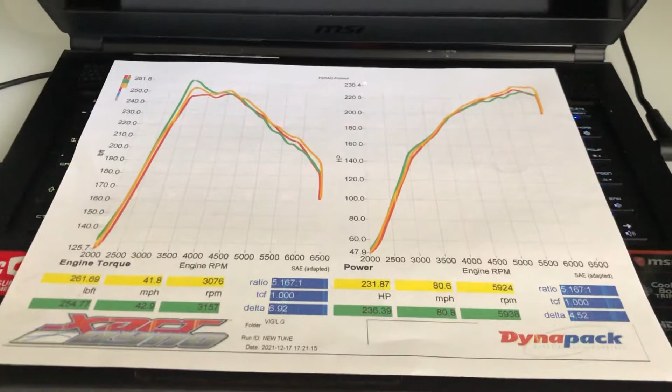I uploaded this, it's kind of a short video of the dyno that I had done yesterday, just for fun. But I wanted to make another video to go over in detail what the power bands look like, and also provide some context as to what is actually happening with this new AIRTEC Inlet. I know a picture means a thousand words, but I wanted to fill you in.

Prior to this, I had just installed the AIRTEC Inlet and didn't tune it. So I just bolted it on and ran it, and I think it ended up giving like 216 horsepower, something like that, and I can't remember the torque exactly. It's in the other videos, but it wasn't as much as it is now. I think I had gotten like 230 something torque or whatever.

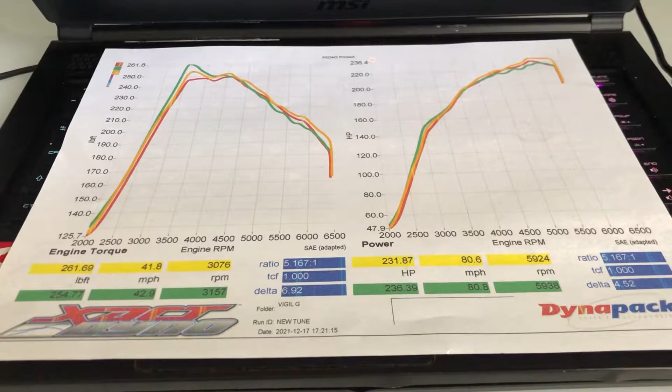So then Ron at WHOOSH had suggested that I get the tune revised through my tuner, Adam at Tune Plus. So I went ahead and got that going, and now I have it tuned, and we have some new numbers here and some new dynographs.

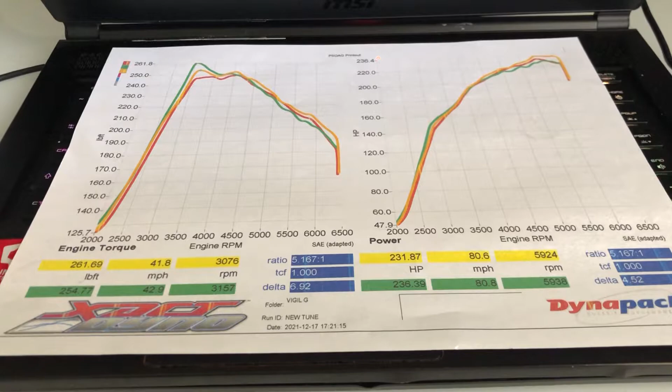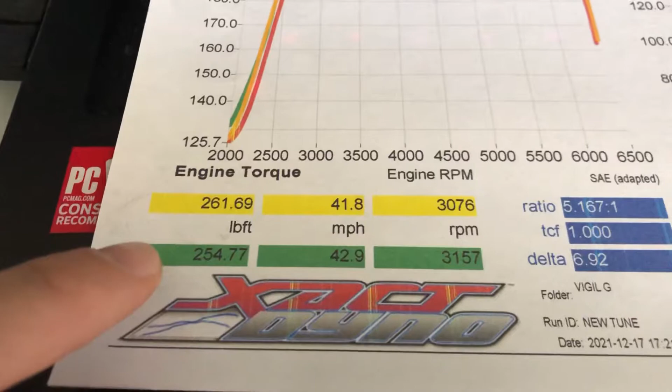For the torque, I think this is gonna have all the highest numbers. So prior to the tune, with the WHOOSH short ram intake, I was making about 250 something pound-feet of torque, and then once I added the AIRTEC Inlet, it actually had dropped. So I got the tune, and the last two stronger of the three passes gave us 261 pound-feet of torque on the third run, and 254 pound-feet of torque on the second run.

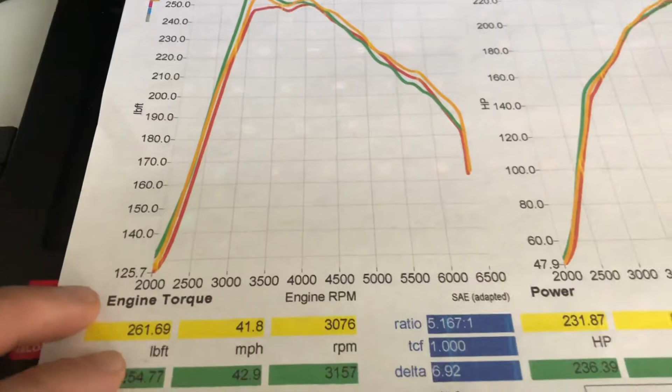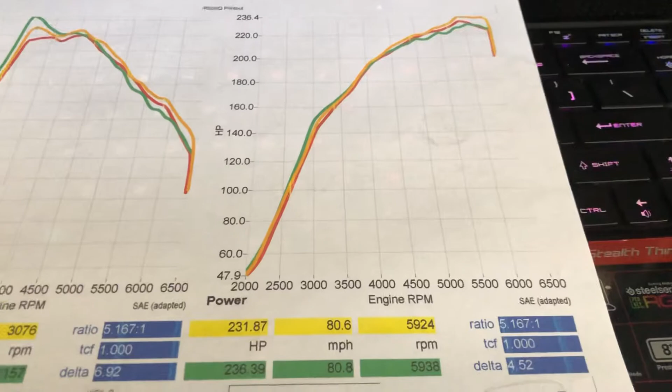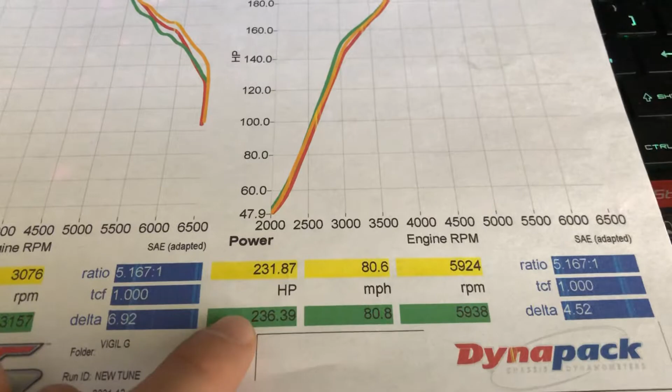And so there's the power band. I'm going to show you this other screen with more detail. Prior to this tune, we had like 215, 216 horsepower. But prior to that, when I originally just had the WHOOSH short ram intake, I was around 230 horsepower roughly. So with the tune, now with the AIRTEC Inlet, I did manage to get back the horsepower I think I had lost by adding the inlet without a tune. The third run was 231 horsepower, and the second run was 236. So we're basically right around or over the horsepower numbers we had prior to installing the AIRTEC Inlet.

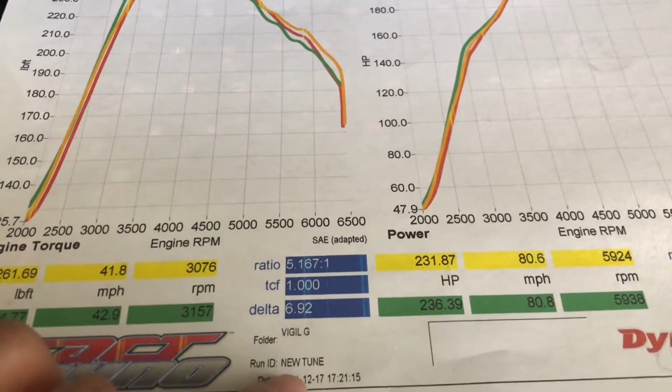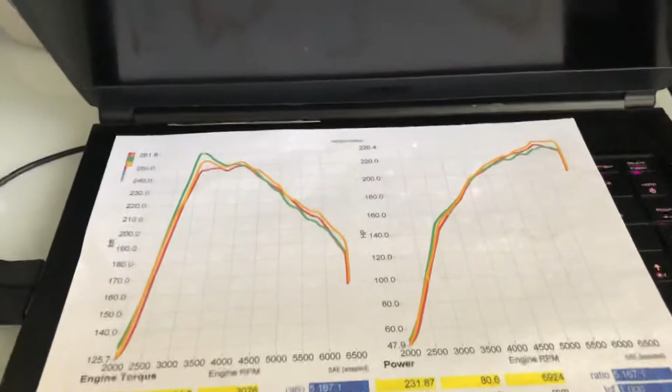But that doesn't tell the whole story, so I'm going to go into detail on this other screen to show you how the power band changed. This is sort of the meat and potatoes here. So just hang in there, I talk a lot, I'm trying to get better at that. But this is basically what we're looking at.

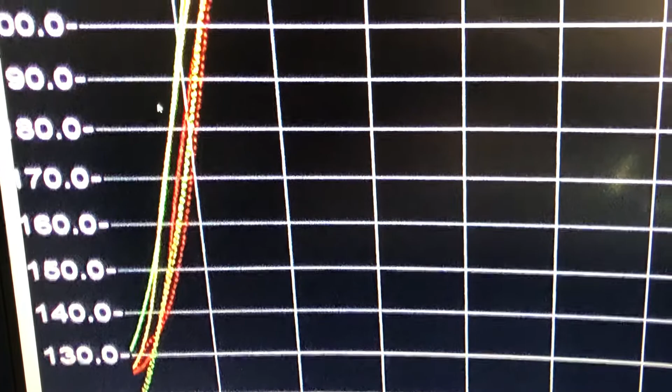So these solid lines up here are the new tune on the inlet, and these dotted lines are prior to that, I believe, I'll have to double check. But anyways, these are the latest numbers. I'm zooming in here to give as much detail as possible. Right around 2,000 RPM, the new inlet actually gets us more power sooner, and it holds above those dotted lines, which are the older revisions without the inlet.

You can see the gap between those two. This is, I think, 3,000 RPM, and so we have the green, the yellow, and the red. They're close, and it almost would seem like the old tune without the inlet had a little bit more. But that all changes, it's pretty consistent, and it's generating more power consistently, right here at the 3,000 RPM range, yes.

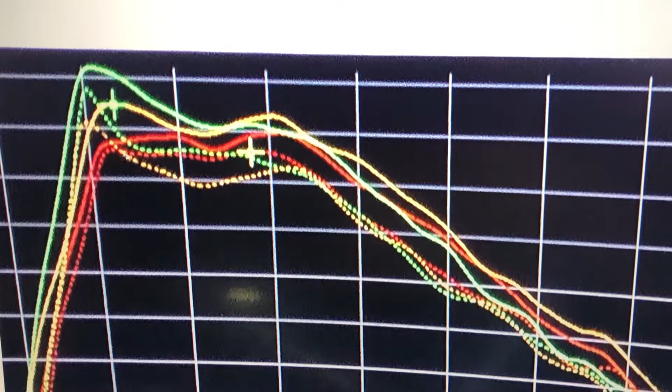But where it gets really interesting is after that. We can see the power gap here between the solid and dotted lines, and we can see how it maintains that gap all the way through here, which is 4,000 RPM. This is where it really gets interesting, the torque kind of continues to hold. Look at the space here.

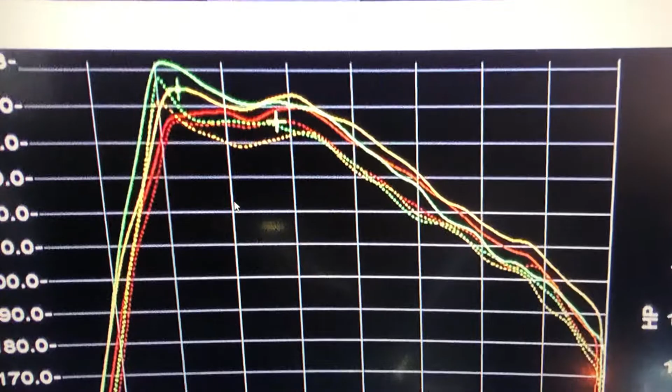I don't know how much horsepower that is, but there's a significant gap, and it holds that torque all the way to the end, basically all the way to redline, which looks like it's right around 6,500. So we do have a nice meaty gain of torque all the way across here. And so I find myself ringing it out further past 4,000 RPMs, just because you can still feel it moving. And then we're gonna go over to the horsepower now.

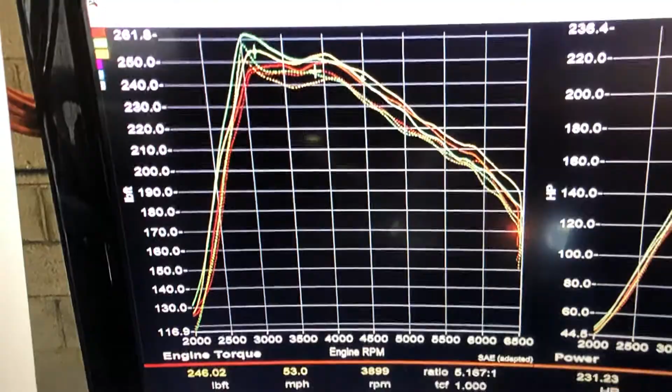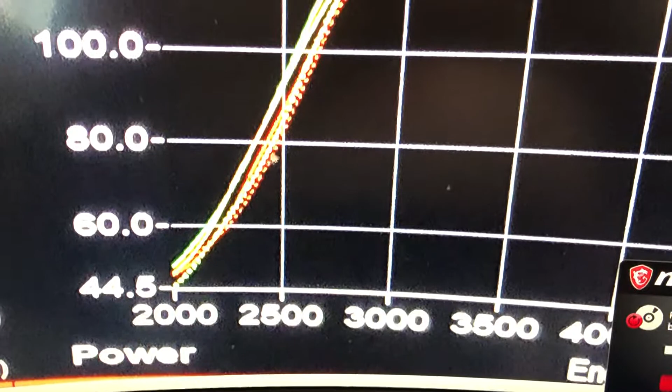So I don't take too much of your time, but here's the horsepower. So the horsepower is also interesting. There's a small gap. It's like we get more torque on it, but we still also get some horsepower. But you can see that it holds longer, right?

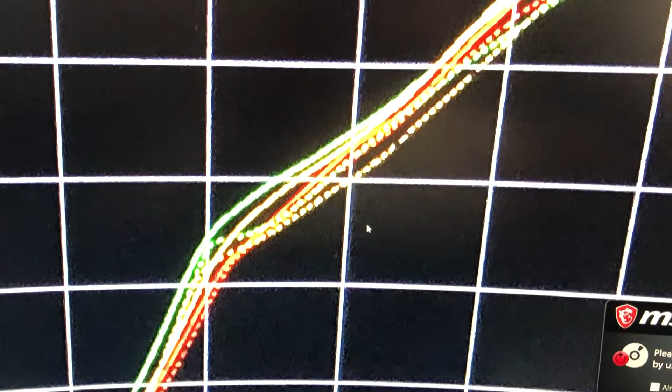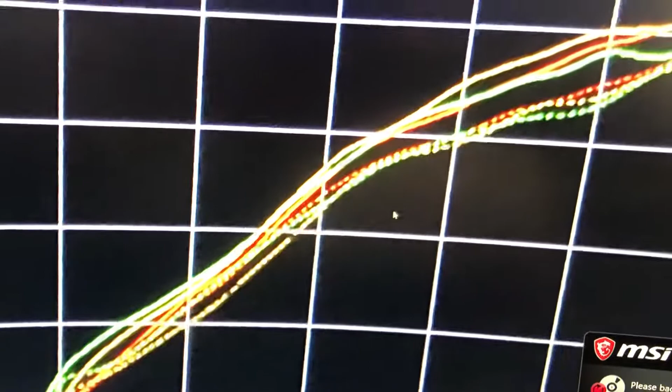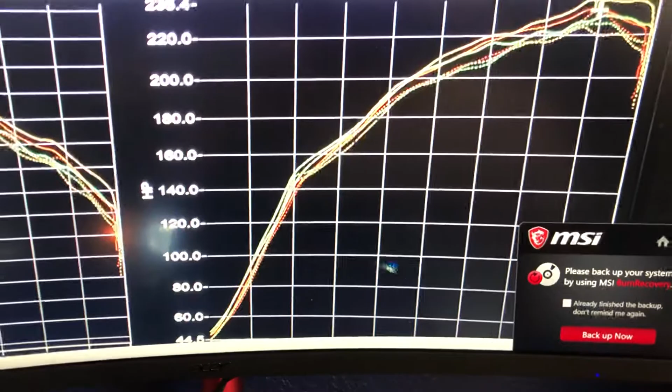So maybe the numbers are almost similar to before I had the AIRTEC with the tune, when I just had the short ram intake. But it has a little bit more power throughout the entire power band here. And as it gets further up in the RPM ranges, what is this now, down here at 4,500, it really kind of separates itself from the other one on the top end.

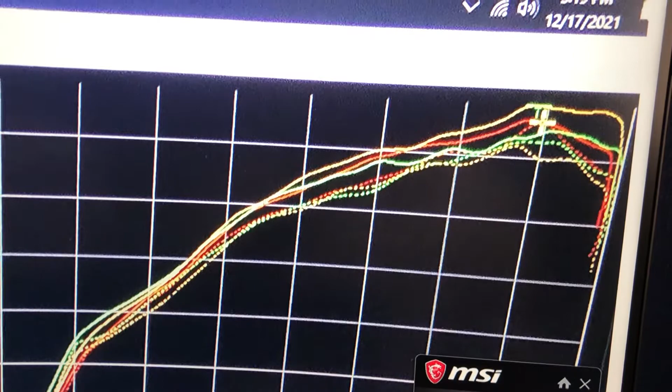And that's what Adam had said, this type of piece is going to give you more top end. And it did. It totally did. I don't know how much to be exact. I need to multiply each sector by the amount of horsepower and get the totals.

But that's a later video, it's going to be super time consuming. But you can even see over here how much more it even holds it to the very, very end, versus before where it would kind of drop.

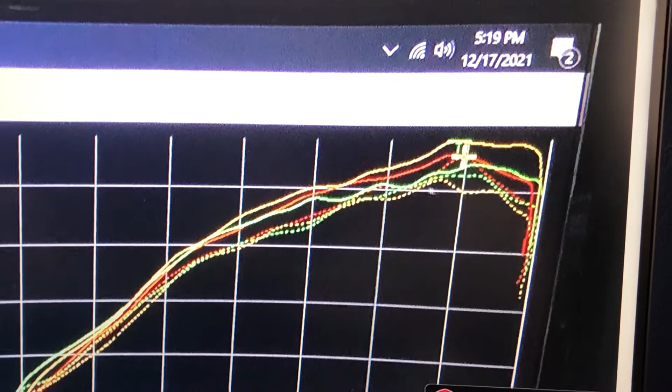So these little increments that you get over that power band just kind of make you want to keep staying on it. I've never really driven my car that far into RPM so often as I have now, just because it starts scooting with the torque, and then that horsepower, right here, right around 4,000, right where that torque starts falling off, it just climbs and climbs and climbs up here, and it's kind of addictive.

So you have to show some restraint. At least I do personally.

But anyway, the final verdict for me is that I was going to take it off before, because I felt like it had more power without it, but that was because it was missing the tune. So there are definitely significantly more gains all across, exponentially in the torque, and also to a degree in the horsepower, enough for you to feel it. Like I can feel it. It moves significantly better.

Now, for those of you that are still watching this video, here's a little detail. When I uploaded the prior video, not the last one, and I put the horsepower numbers and everything, I had said that the car felt like it was making around 250 horsepower based off of my butt dyno. That was a fifth revision of a tune where Adam, my tuner, was trying to sprinkle in a little bit more timing.

I really feel like it was in the 250 range, and the torque was probably in the 280 or 275 range, but I don't want to risk damaging the engine. And also I'm going to be having injectors and a fuel pump installed soon, so there's no point of having a little bit more risky power when I'm about to have those things done, and I can run the E85 and do it safely, etc.

And again, my power numbers seem to be lower than most people's on the internet. I have my own theories about that. If you watch my first video about the car, you'll know.

But anyways, I'm super happy with it. I do want to get a little bit more power, and I'm not even maxing out the turbo yet, but hopefully I'll have some more news soon here.